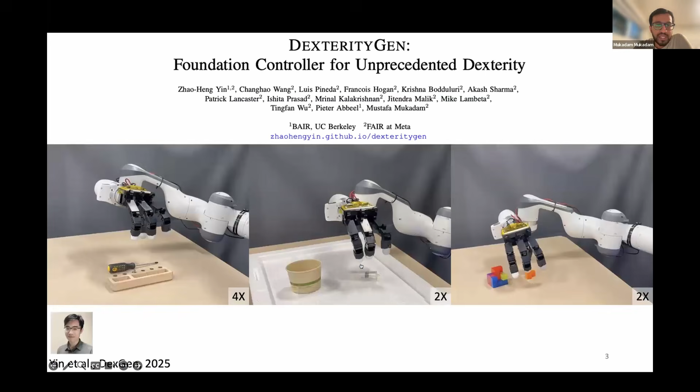And it turns out you can just kind of deploy these with these kinds of complex teleoperation plus skills tasks and show that you can basically do all of these things without ever even having trained on them. Essentially, because what you're exposing the policy to is these rich contact interactions, but not necessarily concerned about what the task is, because that high level information is what the human is going to provide in this setting. And that could be easily replaced by a high level policy or a behavior.

But then, building on top of that work, a lot of the new papers are also thinking about the same idea. What is the foundation model for dexterity? Can we leverage sim and then combine the high level information from humans and bring those two worlds together? But a common theme you will quickly start seeing as you go through these papers and DexGen, which they're inspired from, is basically they're all missing tactile. If you go to our paper or any of these papers in the future work section, you'll see, oh yeah, we want tactile, we want it there.

So what is the deal? Why isn't that happening? And then if it was happening, why do we care? Because it seems like we can do all of these tasks without tactile. So what is that really buying us? The way I've started thinking about this is really on an axis of how far the hand is away from the contact it's trying to control. And so as the degrees of separation increase, my sense is the task is getting increasingly complex. So it's not necessarily that you can't do it. It's more that you become less reliable and slow at doing those tasks.

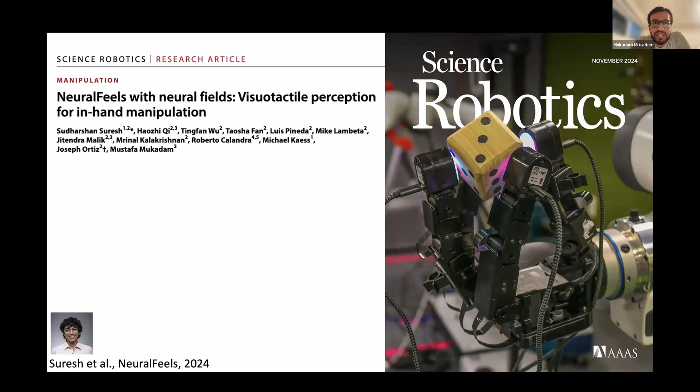And one of the things we saw was, in this work, NeuralFeels, that was led by Sudhu, we can essentially combine vision and touch to estimate novel object poses and shapes in real time as the robot is manipulating them. And a key observation we made in this work was essentially touch acts as a supplementary thing for vision at worst, when vision is completely not available, and when vision is available it almost complements it. And that's a key realization in hindsight, where if you have a lot of occlusion, that's where tactile really provides the value and also adds to the robustness for the tasks you might care about.

So the other thing you might see is like, yes, we can do these tasks, but we're only thinking about success, right? We're not thinking about robustness, or we're not talking about speed. Like these are all pretty sped up videos. We can do a lot better. We should try to think about how to do better.

And so I think we should, as a community, start thinking about what is beyond success and how do we get to speed and reliability, which is actually going to make robots more useful. And in fact, we should be thinking about those two things together. And that's what is commonly known in industry or automation as essentially throughput. And shout out to Pulkit, who recently gave a talk at ICRA making this exact same argument.

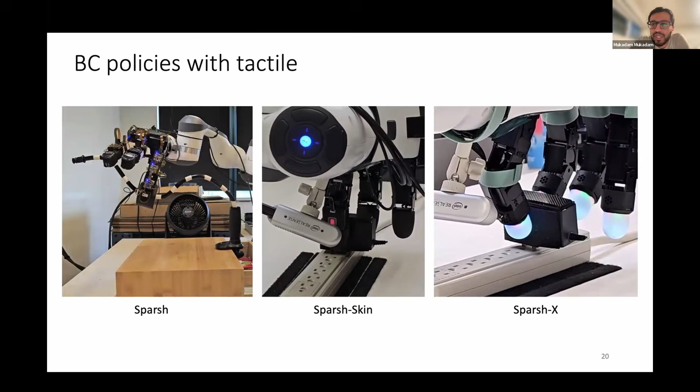But that's all well and good, and we can understand what these representations are capturing. But coming back to the question of how do we actually use it in policies, we could start doing the easy thing, where we essentially teleop and use our favorite behavior cloning paradigm with the sensor data that was collected, and sure, we can train these policies to do simpler manipulation tasks that are possible to teleoperate, and in some cases even show that having more sensory modalities like touch does help, and it actually improves significantly over just using a wrist camera.

But the question remains, right? What if we can't teleop the tasks, and as we discussed, we want to build these foundation models off of simulation data. How do we bridge this gap between a policy, or a foundation model for a policy, built in simulation, while your tactile encoder is built entirely in the real world with real sensors?

So one of the things we did in this work was essentially look at your state-of-the-art simple policy that can do in-hand object rotation. At this point, this has been pretty popular in terms of doing student-teacher RL in simulation using entirely proprioceptive data. What we ended up doing was deploying that sim to real and collecting a really small dataset, like 30 or so trajectories of the same hand doing the exact same task it was trained on in simulation, like the hand facing up and just rotating the object.

What we did was take the pre-trained tactile backbone and start with a zero convolution and slowly add that information into the base model, while keeping the encoder and the policy frozen, and only training on an offline objective of the difference between the actual actions that the policy executed versus the desired actions the policy had predicted. That signal alone is sufficient to slowly start increasing the contribution from this tactile encoder and merging it with the pre-trained encoder that you have from simulation.

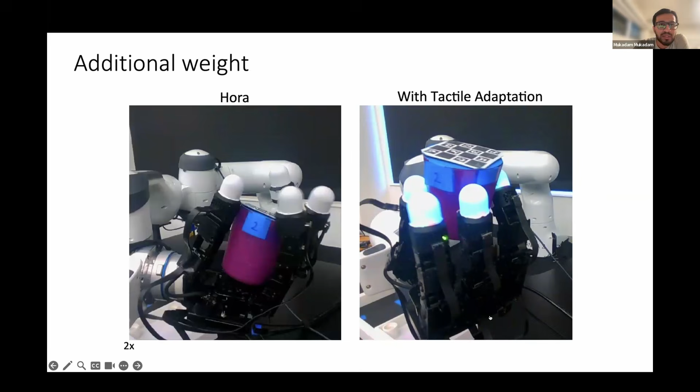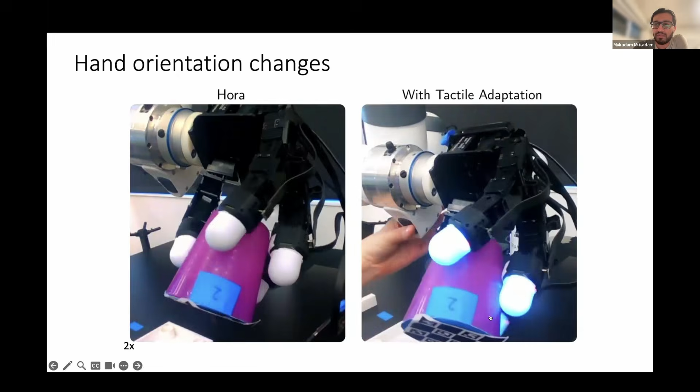What we saw was that same policy with this extra post-training adaptation step in the real world can start improving the simulation policy that hasn't been trained on those kinds of variations, entirely using the tactile sensor as the feedback mechanism. In this case, we can add additional weights. We can even put tape and change the frictional properties of the object, and continue to see more robustness, even though in simulation none of these have been trained. We can even change the orientation of the hand, which is definitely not something we had done in simulation, but the policy still remains robust once the tactile sensor starts providing feedback.

Another approach we looked at, building off of this, was: can we instead use real-world sensors as an extra observation to provide guidance, and take these sim-to-real policies, and instead of merging or blending the simulation encoder with the new encoder, train a new encoder that directly overwrites and learns on top of the original sim encoder? This work led by Rosie and Akash was released recently, called PTLD, which uses a privileged instrumented cell to collect a few demonstrations and then fine-tune on top of a privileged encoder that you get from simulation.

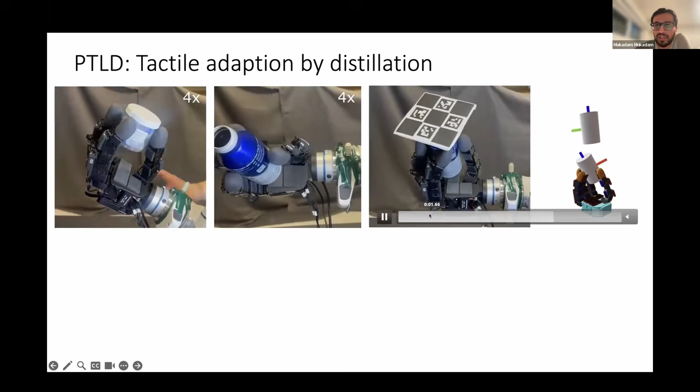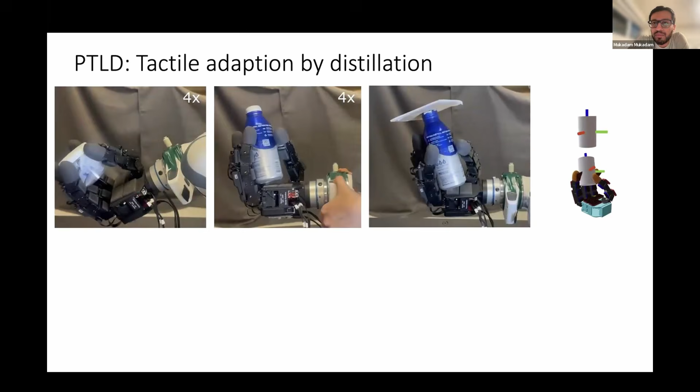What we find is pretty similar: proprioceptive policies transferred sim to real still lack robustness. As you can see in this example, the bottle keeps going up, which is pretty common in these rotation policies, either the object goes up or falls down. With this tactile encoder adaptation through this distillation process, you're able to bring back the robustness and close the loop with tactile. Here are some more examples of more objects doing rotation on the left, and on the right there is a full in-hand reorientation as well. These QR codes are used to provide the goal to the policy, as there is no other mechanism to provide a specific pose goal for the object.

We also compared the two approaches: the previous one I mentioned, which is adaptation through blending, and this approach, which is through distillation. At least in a narrow set of experiments with in-hand rotation, we find that using privileged sensors does help provide more robust information to adapt with the tactile sensors in a better way. That leads to policies that outperform just the pure blending adaptation.

And then, of course, we've mostly been talking about how we take sim policies that never see tactile, and then we only have tactile in the real world. But while the progress in tactile simulation has been slow, I'm starting to get more optimistic. This was a paper led by An and Jaejun that was presented at this RSS. One of the most difficult things with tactile simulation has been transferring shear between sim and real, right?

The older generation of simulations have been very good at transferring normal force, and in fact that was one of the results we had used even for the NeuralFeels work. The encoders were trained entirely sim to real, but because of the geometric nature of the problem we were looking at, it was fine and we could get away without necessarily having shear be pretty good sim to real. But with extrinsic contact interaction tasks where you care not just about the object in your hand but also how it interacts with the environment, you do feel that shear in your fingers and you want that to transfer better.

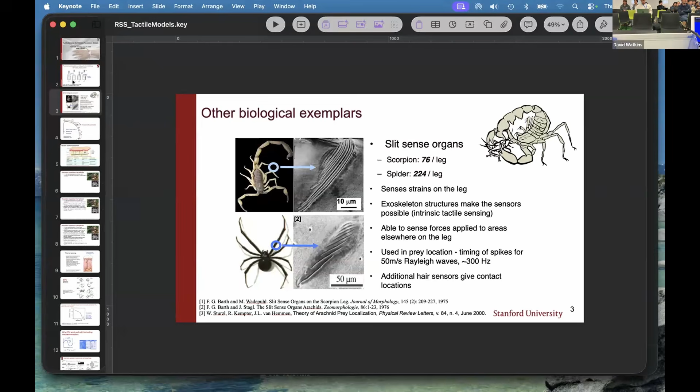All right everybody, by the way, can you see my slide screen? Yeah, okay. It's a pleasure to talk with you. I wish I could be there in person, but among other things I've been on jury duty all week, so I'm not able to travel. But it is a pleasure to talk with you nonetheless about tactile sensing, something I've been interested in now for over 35 years.

And I, with no exaggeration, believe that more progress is being made in tactile sensing within the last few years than in the previous 20. It's partly an evolution of technology and partly machine learning and multimodal learning.

It's interesting, a lot of what's going on is what I would call tactile servoing. And that's important, but it's by no means the only thing we use tactile sensing for, and I'm not even sure it's the major one. In fact, almost nothing that I say today is going to involve tactile servoing.

So my point is going to start out with the idea that tactile sensing—people talk about bringing tactile sensing in with vision—my point is that tactile sensing of itself is already multimodal, and I'll get to that in a few minutes. It's also fundamental.

If you go to the most primitive single cell animals, like a one-cell amoeba, it has to interact physically with the world, and so it has some primitive tactile sensing and response. Tactile sensing is not secondary to vision or chemical sensing. It's absolutely fundamental.

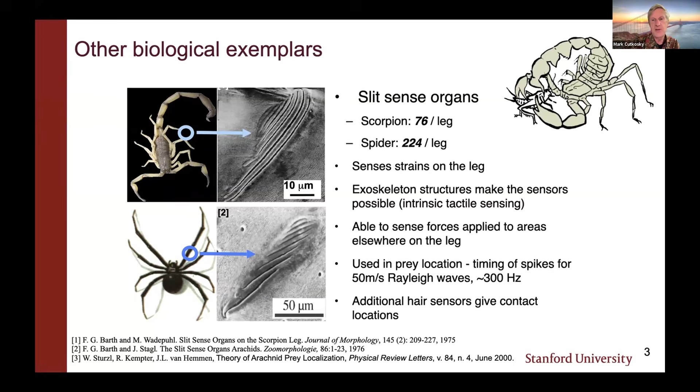All right, well I'm a bit of a disadvantage on this talk because I'm not there in the room with you, but I think I saw briefly during one of the questions that you're sitting on chairs that have a black seat and look like they have metal legs. I hope that's right, and so I'd like you to do a small hands-on exercise.

Take your hand and place it on the seat part of your chair. Now, I believe also that the legs of the chairs are metal. Now put your hand on the metal. You know immediately that it's metal. How do you know that?

Well, it feels cooler, but it's not cooler—they're all at the same room temperature. So it's worth thinking about why it feels cooler. This is actually a very important part of tactile sensing, and a big part of how we identify materials. I'll get more into it in a minute.

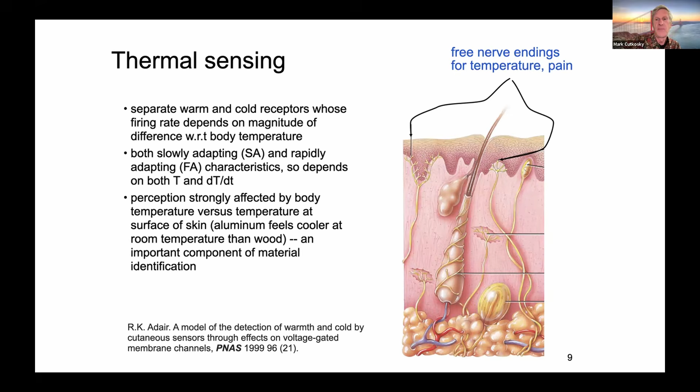And I would say that this mode of sensing, although it's not unheard of in robotics, it's still very underappreciated, especially given how important it is in our daily lives. We also, when exploring for things like texture, use stereotypical exploratory procedures. And again, there's been a bit of this in robotics, but maybe, I think, not enough. For example, when you do surveys across groups or populations of people, we have stereotypical ways that we detect texture, hardness, softness, and so forth. And this is something that has been taken advantage of a little bit in robotics, but not a great deal.

Let's get back to those dynamic sensors again. So I mentioned that the Pacinian corpuscles, they go up to 500 hertz. They actually have a peak sensitivity around 250 hertz, at which we can actually measure little bumps and things, little amplitudes down to just a few microns. And there's a good reason for that. Why would you want a sensor that's sensitive in that range? Well, let's look what happens if you're sliding over a surface.

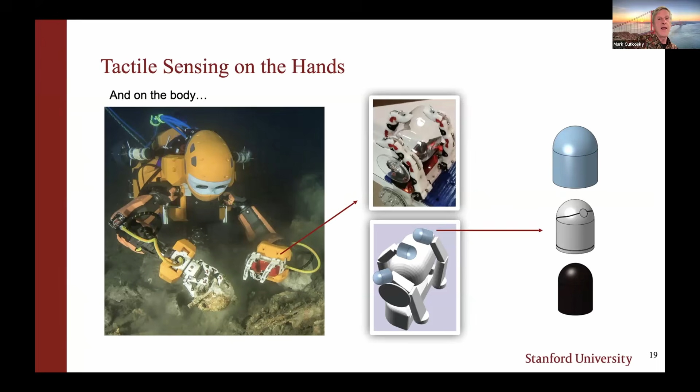So given all that, what are we looking at? Well, there is one technology that works well. It's optical fibers with Bragg gratings. These are used in the gas and oil industry, and you can build them into fingers and fingertips. And so that's what we've been starting to do. There's one paper that came out in IROS last year, but we're actually working on some new tactile sensing ideas. And I can talk about that in the Q&A if people are interested.

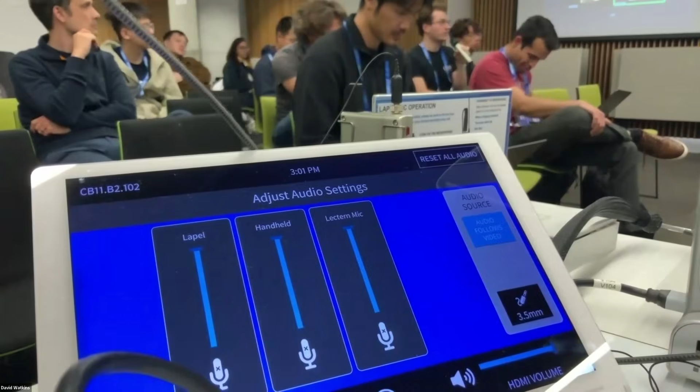There's one question in the room. Hey, thanks for the great talk. It seems to me one of the big reasons that visuo-tactile sensing has been really popular in the robot learning world is because we can use something akin to an RGB type data standard and have rectangular images for everything. I'm wondering, for some of these other types of subcutaneous tactile sensors that can't right now be represented that way, do you think the bottleneck to integrating them is the data representation, or is it the density of the sensors themselves?

I think it's both of those. There are efforts to do multimodal fusion, treating the dynamic sensing. In some ways it's closer to how people are starting to fuse audio with vision. And you do have to respect the fact that you're pulling in data at a fundamentally different rate. You do have to timestamp. I don't think you want to just downsample to match your vision, because then you lose the salience of these important tactile events.

But it is a fundamental thing, and you know this because if you watch a video conference and the connection is not great, you tolerate choppy video much better than you tolerate choppy audio. And it's really the same. Tactile sensing in that regard is much more like audio.

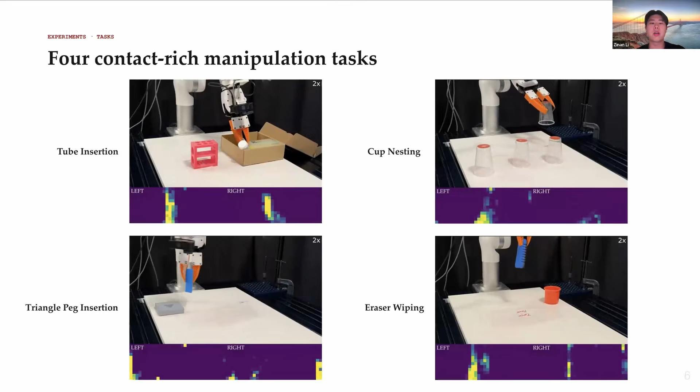We evaluate Felt on 4 contact-rich tasks: tube insertion, cup nesting, eraser wiping, and triangle peg insertion. We collect 60 demonstrations per task and train separate diffusion policies. This clip shows the 4 tasks with generated left and right tactile signals below each RGB frame.

Each method is evaluated for 20 real robot trials per task. Real tactile consistently improves over the vision-only method. Replacing the sensor at deployment with Felt-generated tactile also improves final success across all 4 tasks, matching real tactile on cup nesting and triangle peg insertion task.

Felt features use no real tactile readings during downstream policy training or deployment, yet remain competitive with real tactile and reach 90% on triangle peg insertion task.

To summarize, Felt generates structured per-finger tactile signal from a single RGB frame using a topology-aware architecture. Both generated tactile images and latent features improve contact-rich manipulation tasks over vision alone, enabling downstream policy without physical tactile sensors at deployment.

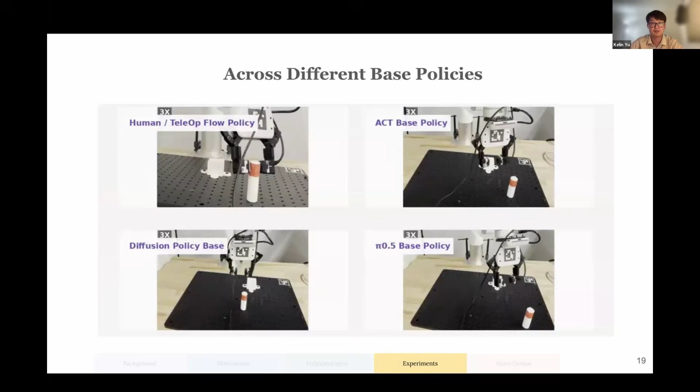And so we compare it with different RL pipelines to show that with this formulation, our pipeline with warm start and the general policy is more efficient. And we show that it can be generalized across different data sources, different base policies like human policy and Pi 0.5, and different tactile representations like different tactile encoders for tactile images and the tactile mask.

And we show that within 1 hour of training, it can increase success rate by 50% for all of them. And we also conduct evaluations for reward shaping, residual policy, warm start strategy, and the action space design. And finally, here is a one-take 40-minute training demo to show its effectiveness.

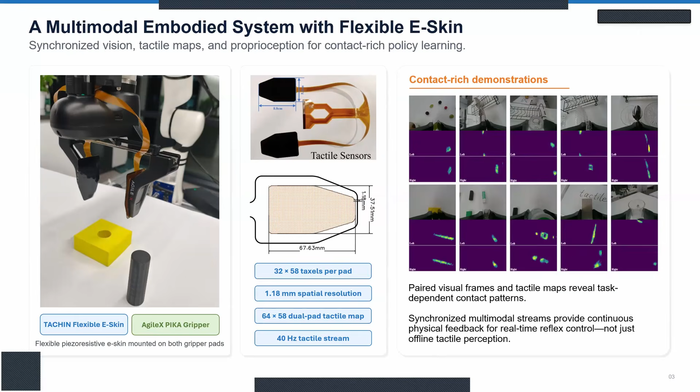Tac-Cerebellum has 3 modules. First, Mamba encodes fast tactile streams, suppressing redundant free-space history while retaining important contact transitions with linear complexity. Second, FiLM grounds each modality using the other modality and robot state, while SwiGLU routes stage-critical channels. This provides 2 benefits: intermodal balancing during contact and intramodal refinement that preserves stage-critical features.

Finally, in latent-to-action generation, the fused multimodal latent directly serves as the flow source, avoiding Gaussian initialization and repeated sensory conditioning.

We then evaluate disturbance rejection and safer contact response. When the cylinder is manually rotated, the vision-only baseline fails under partial occlusion. Tac-Cerebellum detects the tactile change and compensates. During misaligned insertion, the baseline keeps pressing downward, while Tac-Cerebellum detects asymmetric resistance and performs a compliant rollback. High-frequency touch therefore supports online correction and safer interaction.

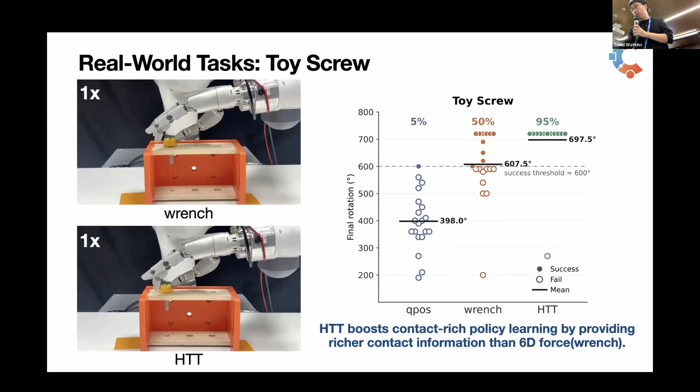We also conduct real-world tasks, for example, in toy screw, compared to using a 6D force vector on fingertips, HTT boosts contact-rich policy learning by providing richer contact information and leads to a much better success rate. And in another fragile grasping task, where we grasp a soft, room temperature tofu, HTT is shown to grasp the tofu gently without breaking it and without slipping, compared to using simple force vectors as the condition.

So through comprehensive evaluation, we show that HTT improves tactile perception performance, boosts policy learning, and adapts to unseen sensors in the real world. To summarize, we believe that learning from paired tactile data is a promising path toward generalizable tactile representations. From the data perspective, we propose the OmniTactile device that makes paired tactile data collection scalable. And from the model perspective, we propose cross-modality alignment on paired data, showing that it can further improve heterogeneous tactile pre-training compared to MAE pre-training alone.

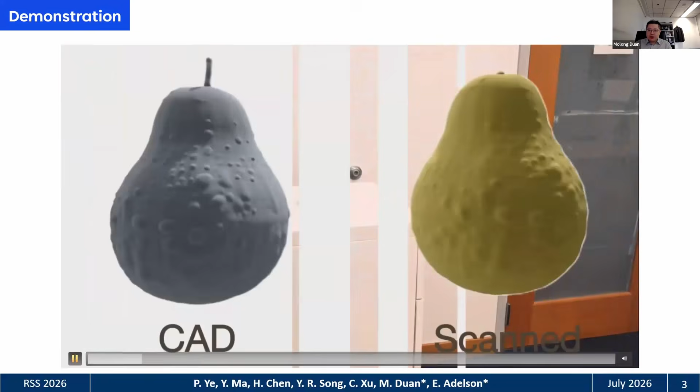Since this is a short presentation, we would like to start with a demonstration first and then gradually go deeper into the method. In the beginning, we use an iPad type of scanning app - this is the Kiri app, which enables direct scanning from our mobile devices. Once we have the CAD data, either from scanning or the original CAD data, we have a mesh-to-point process where you basically have this dense cloud.

With this cloud, we perform partitioning so you have a lot of small patches distributed along the surfaces. We have smaller local tactile points which will be used as the testing data. After that, we also have the experimental demonstration showing that if we have both the contact from the motion capture system with the tactile sensing and a particular object, we have a ground truth signal to verify the detailed localization methods. Then we can use that for downstream tasks.

With that highlight information, I would like to go deeper into this. The first stage is relatively straightforward - we just have this decomposition. In the second stage, we have the tactile surface localization with the point cloud and patch information. Assuming real-time point cloud information from the tactile sensor, we can establish a neural network with a tactile encoder with surface patch matching.

So you know how close this current real-time measurement maps with your existing patches of existing information. Then you can have additional pre-trained weights and a determination module to understand the final pose in this manipulation task. We have a coarse-to-fine localization network with virtual pre-training using patch samples dense from the mesh, and few-shot fine-tuning from a small set of real tactile contacts. Here is the detailed network structure.

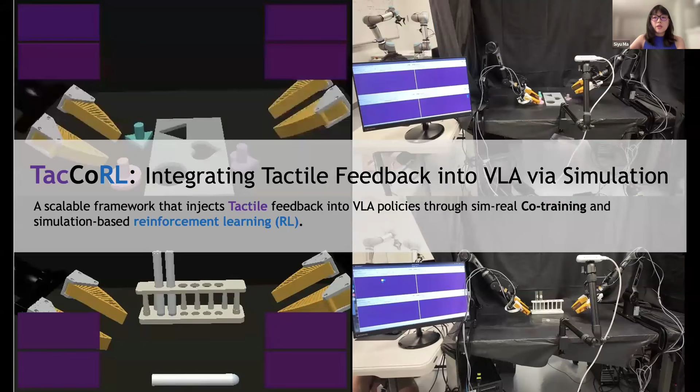To integrate tactile feedback into pre-trained VLA policies through simulation, we present TacCoRL, a scalable framework that combines sim-real co-training with simulation-based reinforcement learning.

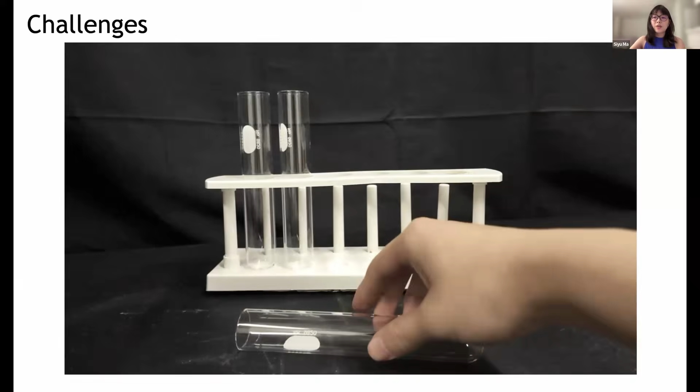Precise contact-rich manipulation requires both vision and touch. Vision interprets the scene, while touch reveals contact interactions. For robots, the challenges are clear: visual ambiguity in subtle contact states, limited supervision for near-failure recovery, and the cost and risk of exploring failures directly on hardware.

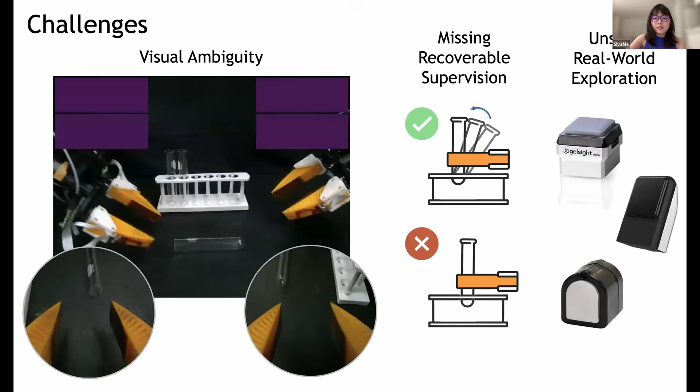To address these challenges, we propose a three-stage framework. First, we collect a small set of real demonstrations and expand simulated teleoperation data with MimicGen.

Then, supervised training injects tactile history into the vision language model backbone and action expert, giving the pre-trained vision language action model an initial tactile-conditioned behavior. This makes sparse reward reinforcement learning tractable by turning exploration from scratch into contact-aware policy refinement.

Finally, RL fine-tuning uses sparse reward in simulation to learn contact corrections, where real demonstrations enter the update and prevent simulator-specific drift. Our pipeline enables TacCoRL to adapt VLA policies with limited real data and safely refine tactile-guided behavior in simulation.

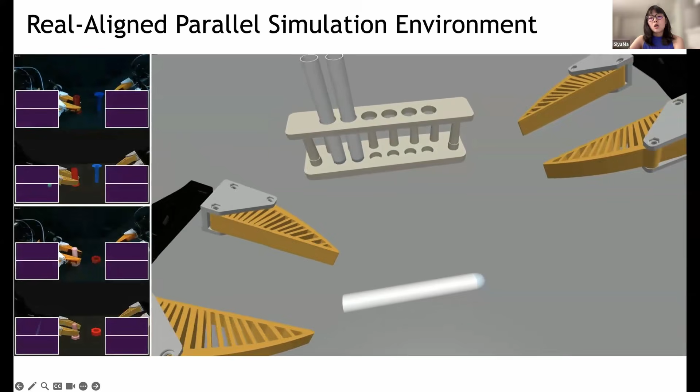To make simulation training useful on the real robot, the simulator must match how our policy sees, acts, and feels. So we align the task settings, cameras, controller response, and tactile readings using 128 parallel simulation environments. The policy can safely learn contact recovery behaviors that are hard and difficult to collect on real hardware.

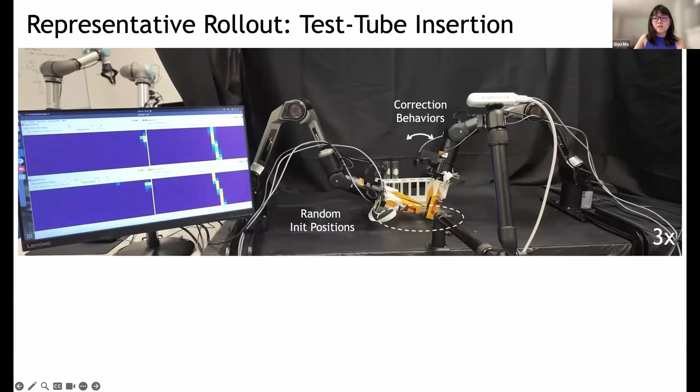Here's the representative real rollout for test tube insertion. Across trials, the tube starts from randomized initial pose. As the robot approaches the rack, the gripper and the tube increasingly occlude the opening, making the critical contact states difficult to infer from vision alone.

Upon rim contact, TacCoRL uses tactile history to make small closed-loop translational and rotational corrections rather than pushing directly downward. These adjustments reduce angular misalignment and enable continued insertion, allowing the policy to recover from diverse near-failure contacts and complete four consecutive real-world insertions in this representative rollout.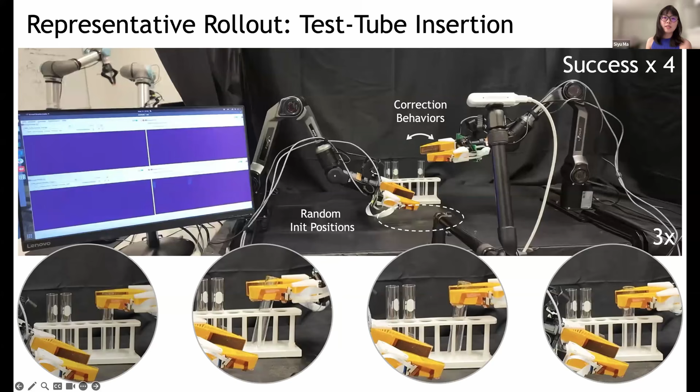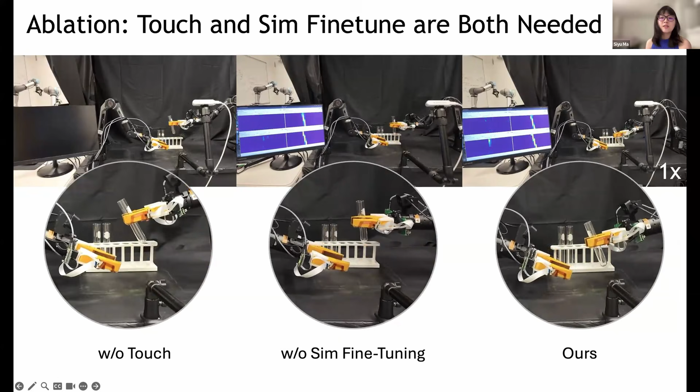This ablation shows that both touch and simulation fine-tuning are needed. Without touch, the policy cannot observe hidden contact errors after occlusion, so it often keeps pushing in the wrong direction. With touch but without simulation fine-tuning, the policy can receive tactile signals, but it hasn't learned how to convert tactile readings into recovery actions. Our method combines tactile feedback with simulated trial and error, allowing the policy to search, reorient, and stabilize contact before insertion. This leads to more reliable contact-rich manipulation.

We evaluate our policy on 4 real bimanual contact-rich tasks: test tube insertion, puzzle placement, and 2 assembly tasks. Across these randomized real-world trials, the final Visuo-Tactile policy achieves 72.5% average success rate. This demonstrates that tactile feedback, refined through real-to-sim simulation, can generalize across contact-rich settings and be effectively integrated into pre-trained VLA policies.

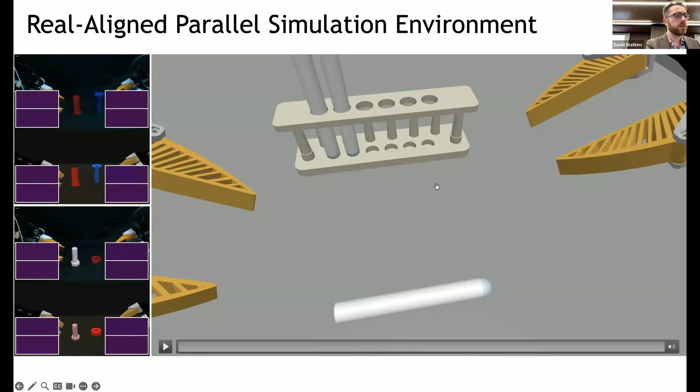Cool. Can you see my screen? Yes. Yeah, thank you so much. So this is Yuyang Li from Peking University in China.

I'm glad to be here to share about our recent paper on fingertip integrated simultaneous tactile visual sensing for multimodal robotic manipulation. Everybody in the room might be familiar with vision-based tactile sensors, or VBTS. From early research from MIT to recent commercial products, our lab has been tracking its progress, building the F-TAC Hand with full hand tactile sensing, TacMan for articulated object manipulation with tactile, and Taccel, the vision-based tactile sensor simulator on GPU.

Throughout our research, one key issue of tactile sensors has been bothering me: they're blind until the moment of contact. They only provide post-contact feedback, and cannot perceive the last-inch gap near the fingertip prior to interaction, which is really vital for precise contact and manipulation.

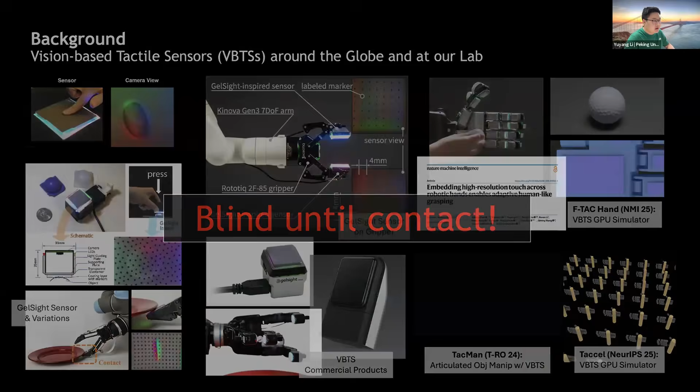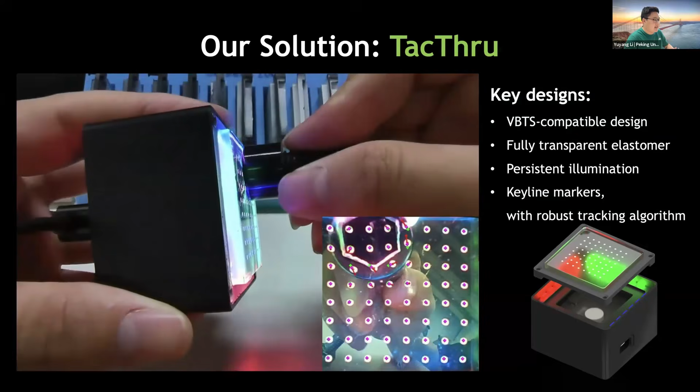To bridge this gap, our solution is called TacThru. It is a see-through skin sensor that provides simultaneous vision and tactile sensing from the robot's fingertips. It's based on a VBTS design, but it removes the reflective coat so the camera inside can see through its skin, which is the transparent elastomer. The robot can now actually see the object from its fingertip prior to the moment of contact, while also tracking the visual and tactile signals of the object and environment throughout the entire interaction process.

The issue here for tactile sensing is that although the transparent elastomer makes vision clear, it also makes it tough for tracking conventional tactile markers like the black ones you see here, as they may vanish when the background is also black. So we designed keyline markers, producing concentric double-layered markers with high contrasted colors, the black and white ones, so the detectable feature will always be visible to the camera.

This is more clearly demonstrated by the comparison here. You can see the black markers easily vanish due to the dark background, while our keyline markers ensure detectability and no marker is missed. We also introduce a super lightweight blob filtering technique to reduce false positives from blob-like patterns in the environment being misdetected as markers.

Finally, we can firmly track all the real markers as shown by the green arrows here. This tracking is super effective and efficient, achieving full marker tracking with only a subtle time budget of about 6 milliseconds. This enables high frequency runs like 120 Hz. The fabrication of TacThru is also super compatible with VBTS sensors, so if you can make a VBTS sensor at your lab, which I believe you can, then you can try to build a TacThru sensor using exactly the same material.

And before you get your hands dirty, check out our further results on manipulation through a UMI platform performing various tasks, including picking up a thin and soft tissue, a paper tissue that tactile sensors fail to detect, and sorting tiny balls into the correct bowl that are hard to see from the wrist camera.

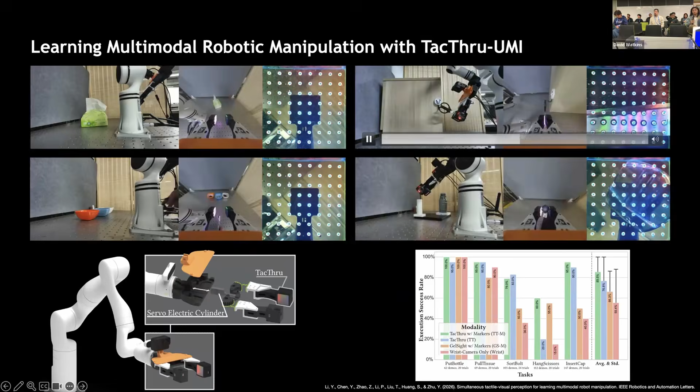All right. All right, so just place your computer over there. Perfect. No, please share just so we can keep recording. Make sure you haven't enabled your microphone. I haven't. Great.

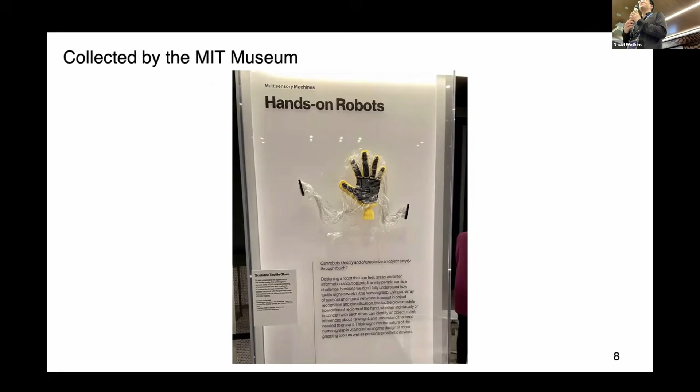And the glove right now is actually collected by the MIT Museum. If you have a chance to go to Boston, this will be the first thing you see when you enter the AI section of the MIT Museum.

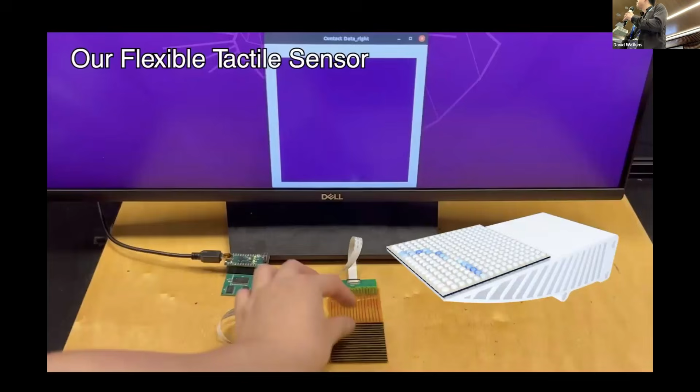So since then, obviously, we want to make sure this kind of sensor is compatible and useful for robots, and especially think about the scaling up efforts of these tactile signals. So we first make sure we can learn visual tactile policies for robots to do manipulation and scale up both the simulation data and the real data. Start from the first work, 3D ViTac. This is actually one of the first works we have been doing since I became a professor.

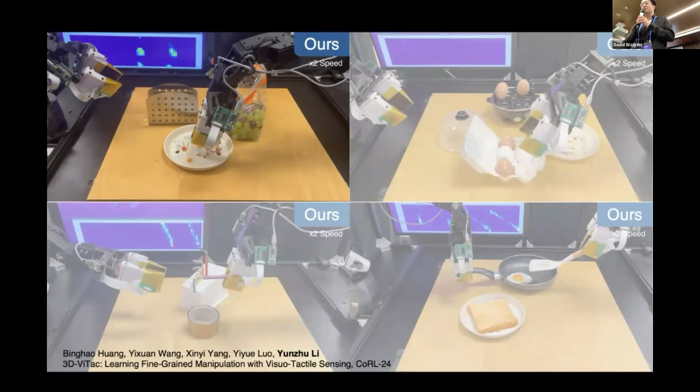So we extend upon the sensor to make it higher resolution, with a better signal to noise ratio, and more importantly, make sure it can be integrated with the robot fingers. So what we did was integrate our tactile sensor on the robot gripper, and we did imitation learning. Here on the back, you can see the real-time visualizations of the tactile signals, which show that the robot can rely on the tactile signal to know whether there are grapes between the fingers or not in the face of visual occlusion.

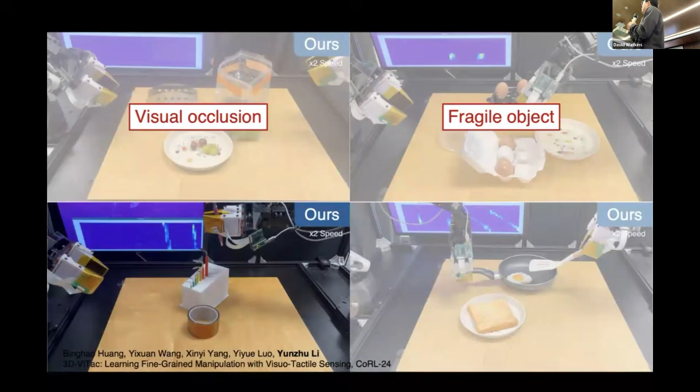For the top right, the robot is trying to grasp an egg, and there will be a person perturbing the robot from doing the job. The robot knows to try again because it feels nothing between the fingers and redoes the grasping behavior. It can also do precise in-hand reorientation, where the tactile sensing on the back screen shows the precise position and orientation of the hex key between the fingers, and also bimanual coordination.

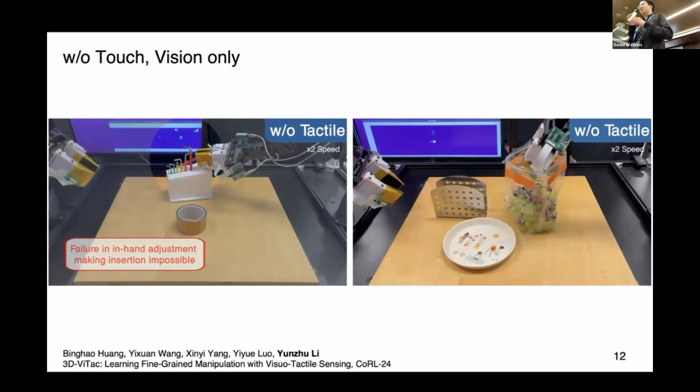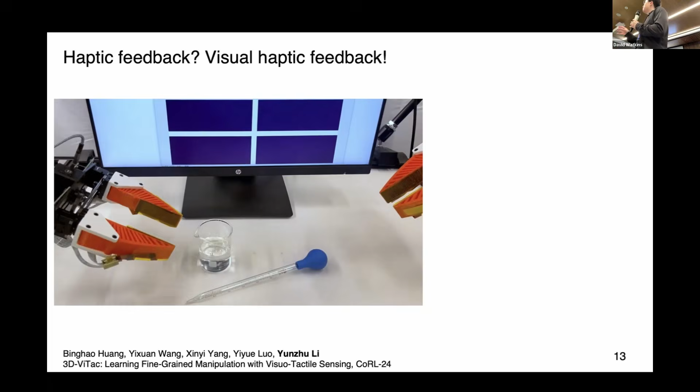Then there's actually one very interesting observation we got when we did this paper. When the human teleoperator collects the visuo-tactile demonstration data, we found it is very, very beneficial to give the human some visualizations of the tactile signals. Because the device itself, we use ALOHA, didn't provide the human subject with haptic feedback. But visualizing the tactile signals can be regarded as a type of visual haptic feedback.

And we realized it can actually significantly improve the human subject's success rates, and also the efficiency at which the human subject is able to collect demonstrations. Meaning this kind of visual haptic feedback is very handy for the human subject to know whether it's time to switch to the next subtask, or to have a better understanding of the system state.

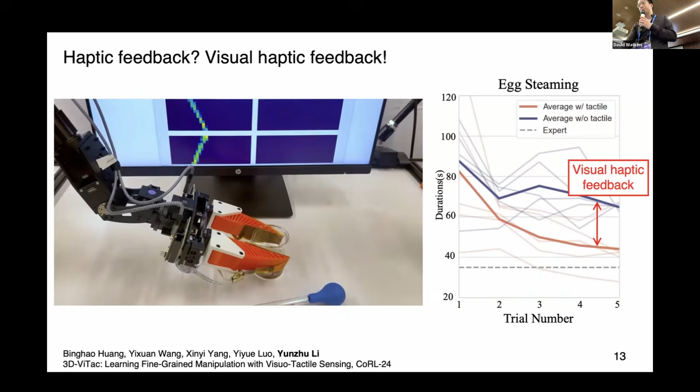Another question we typically get is about the sensor resolution. Our sensor resolution is about 2 to 3 millimeters. And people are asking, how does that compare with humans? There's actually a very famous cognitive study, I remember it was in the 80s, trying to understand the sensitivity of different parts of the human body. They came up with a very interesting experiment called two-point discrimination.

Our lab has hugely benefited from many open source hardware projects. So we made very strong commitments and efforts to make sure the sensor is as reproducible and as accessible as possible. We released a very detailed reproduction guide with step-by-step fabrication instructions for everyone to reproduce this sensor. Some people are also asking about the cost. Given our most recent design, assuming all the materials have arrived, it will only take you 2 minutes to put the sensor together and the sensor can start functioning.

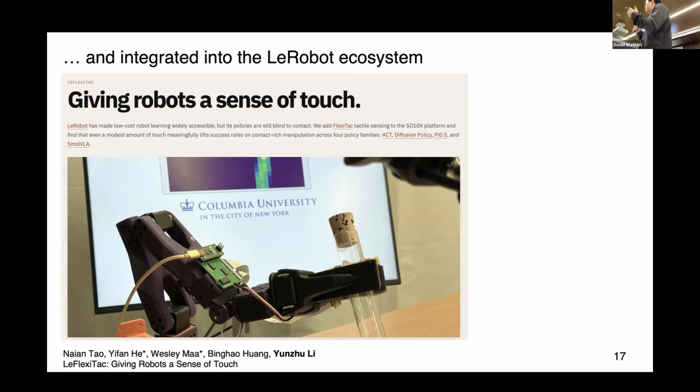We have also made a lot of efforts to make sure the sensor is compatible with the LeRobot ecosystem, such that for people who are interested in and have the capacity to play around with the LeRobot ecosystem, it will be easy to put the sensors into LeRobot systems to do many different manipulation tasks using the SO-101 robots. So we made a lot of efforts to increase the accessibility of our sensor.

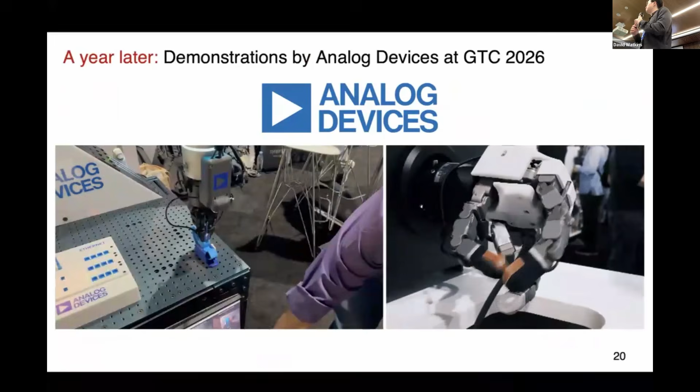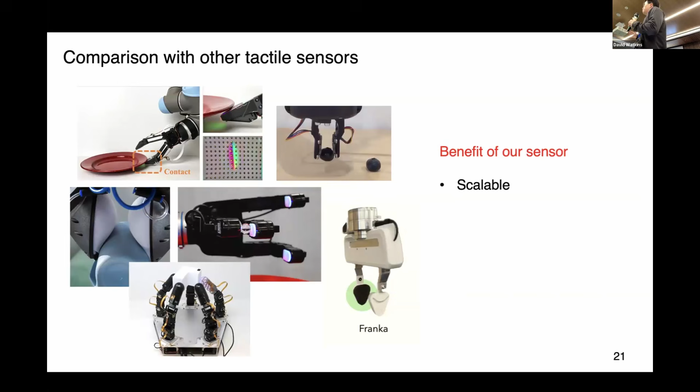Many of you might also have the question, how does the sensor compare with other tactile sensors? One interesting thing about touch compared with vision is that touch is still a field where the mechanism hasn't converged yet. Many people have different opinions and preferences about the sensor. Compared with other ones, especially optical-based, capacitive-based, and magnetic-based ones, our sensor is scalable. It can be produced at a large scale, and at different sizes with different coverage areas. It's also very flexible. In essence, our sensor is just a piece of paper. You can bend and stretch it like you might do to your paper. It's also very easily customizable into different form factors.

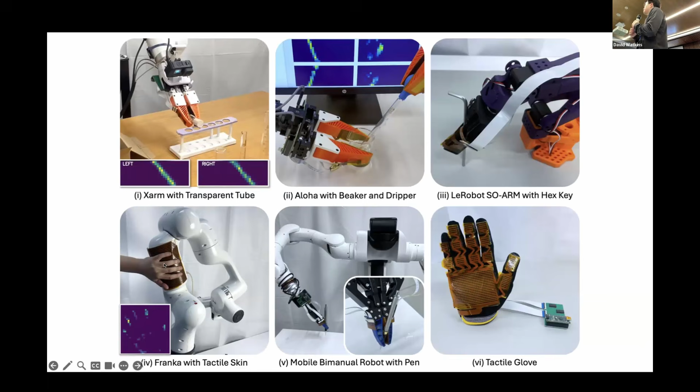We have already shown that our sensor can be customized into, for example, glove shapes or fingertip shapes, and also some kind of robot skins for the robot to get some more scalable understanding about those kinds of contact events.

And it also has very good robustness and consistency. When I talk about consistency, it's about consistency across different types of use and also different fabrications of the sensors. One data point I can give you is that my students fabricated four sensors for NVIDIA during the summer of 2024. About 1.5 years later, they are still using the sensors, and the sensors still enable the robots to do exactly the same task. So that speaks to the overall robustness and consistency of our sensor.

And lastly, I want to highlight one very important benefit, which is the compatibility of our sensors with simulation. We just heard a spotlight talk that uses our sensor, and they are also building simulators around it. The most important aspect of simulation is the correlation and alignment between real tactile sensing and simulated tactile sensing.

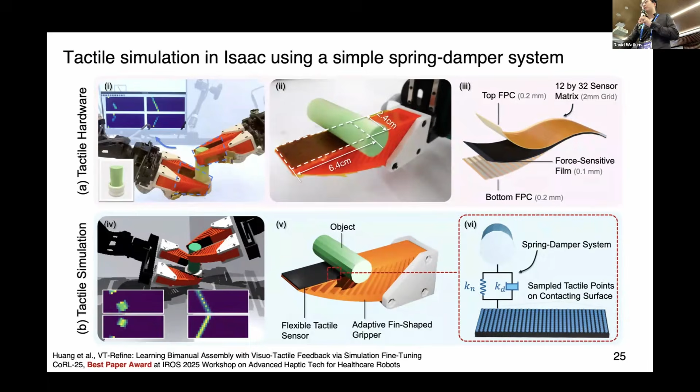So we implemented a very scalable and efficient implementation for our tactile simulation based on spring-damper systems. Very simple, just 2 parameters for you to identify. And what we can achieve is the simulation shown on the right. It has very strong alignment with whatever happens in the real environment.

After you have the simulation, there are so many things you can do in simulation. One notable thing we did was to go through this real-to-sim-to-real loop, using scalable simulation reinforcement learning training procedures to fine-tune the policies so they work in the real environment. Here is one example showing robots equipped with our sensor going through this real-to-sim-to-real procedure, allowing the robot to do bimanual assembly of pieces from the factory benchmark. These are actually robots in my lab.

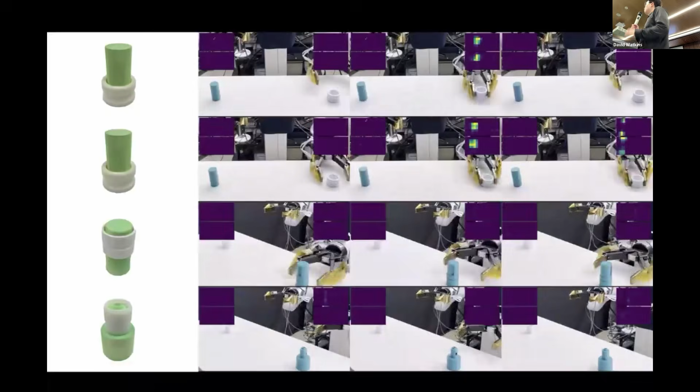And we have also shown that exactly the same pipeline works on the robots at NVIDIA. They are also following this real-to-sim-to-real pipeline, doing simulation fine-tuning of visuo-tactile policies for the bimanual assembly task. So this is how we are scaling up the simulation data. At the same time, we're also trying to scale up the real data.

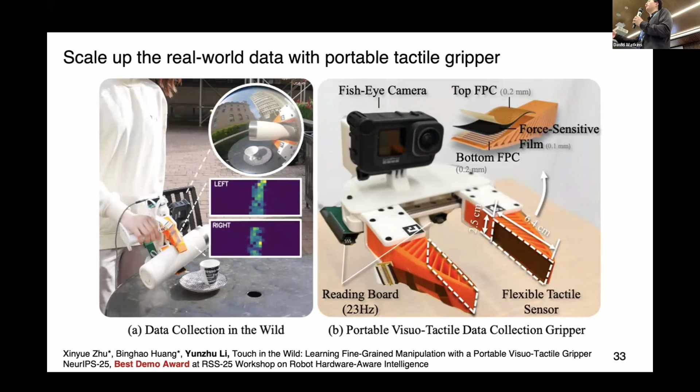On the real side, what we have been doing is in some ways similar to what other people have been thinking about. It integrates the tactile sensors into the UMI gripper. There's one very interesting insight in this process. For anyone who has played with UMI grippers, it's essentially a handheld device you use to do in-the-wild data collection.

Because of the mechanical spring within the UMI gripper, the human subject actually feels haptic feedback during the interaction. But the original UMI design never stored any of that haptic information; only position information was stored. So that is a very important missing piece of the original UMI. Integrating our tactile sensors into the UMI gripper not only keeps it very portable for in-the-wild data collection, but also fills in the last missing piece by storing the haptic feedback indirectly in the form of tactile signals.

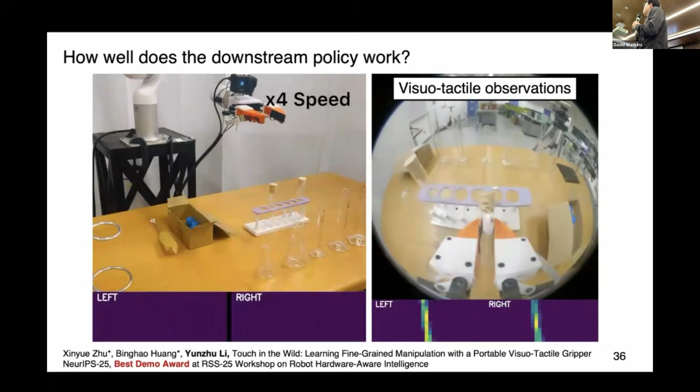And on the right is the exact input to our policy, where the first row is the visual information and the second row is the tactile signal. Just from visual information alone, it's very hard to see the position and orientation of the transparent test tube. But from the tactile signal, the specific in-hand object state is very obvious. And that is very important for the robot to successfully accomplish this task.

So we have also done many other tasks using this pre-training and post-training framework, like in-hand reorientation and insertion of the pencil. And also tasks that require precise force modulation, where you want to release the gripper to suck the fluids into the glassware, but you don't want to release it too much, such that you release the pipette. So this requires very precise force modulation. And also, obviously, the classic one of wiping the whiteboard. So this has been our effort to also scale up the real data.

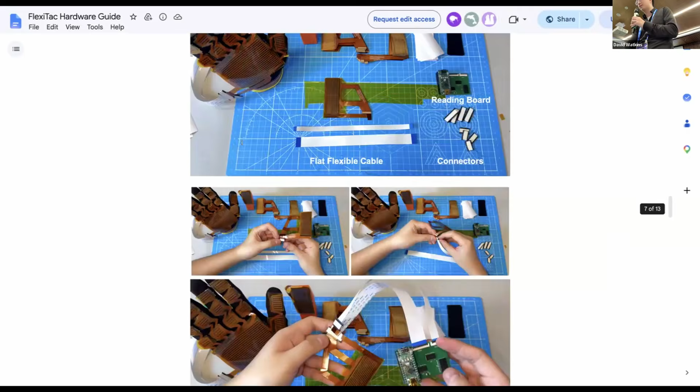On this front, we have actually been releasing a lot of open source resources for you to play with. For example, this is our fabrication guide. It's simple but works. We have, for example, the bill of materials for you to follow in order to get all the materials you need. And we also have very detailed fabrication guides together with videos showing you how you can very quickly put the sensors together and connect them with the hardware in order to read out the tactile information.

We have also released the simulation environments that we use to do the simulation fine-tuning, specifically in both Isaac Gym and Isaac Sim. This unlocks a lot of possibilities for you to use all the power of GPU-accelerated simulation. And we have also put up a list of works that are built on top of our sensors. And really you can see that our tactile sensors, although the mechanism is very simple, are starting to grow into an ecosystem where many people are building on top of our sensors for many different manipulation and interaction tasks.

So in the end, I want to share one teaser work that is still ongoing, but we have actually achieved some very interesting manipulation and world modeling results with both vision and touch. Here, what you are seeing is a multimodal 3D world model. What you are seeing here is a live interaction using keyboards to control the robot to do this kind of bimanual in-hand reorientation and insertion process. This is not a real recording. This is not physics-based simulation. This is pure action-conditioned 3D video prediction. And this can run at 15 Hertz.

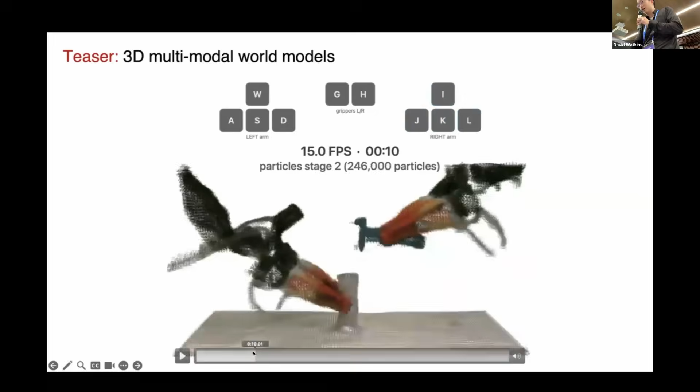And you can also see, during the insertion process, the visualization of the tactile signal, which has very nice alignment between our tactile pads and our visual point clouds. So you can distinguish between two cases. One, where you haven't been able to get a good alignment, so you slide over the tube. And here is the second example. After you have done more precise in-hand reorientation and more precise alignment, it will be able to actually insert the piece on the right into the tube. So this shows a very nuanced understanding of physical interactions using our 3D multimodal world models that you can interact with in real time.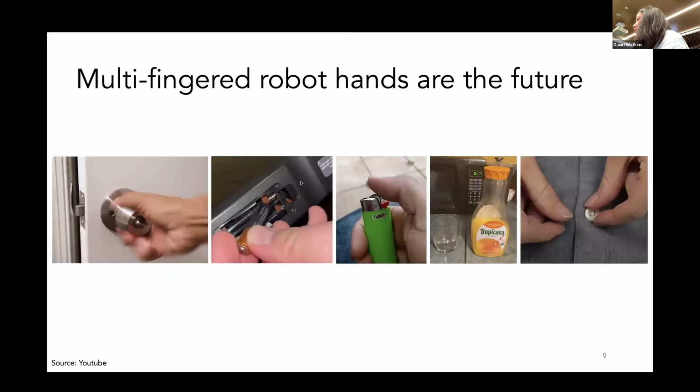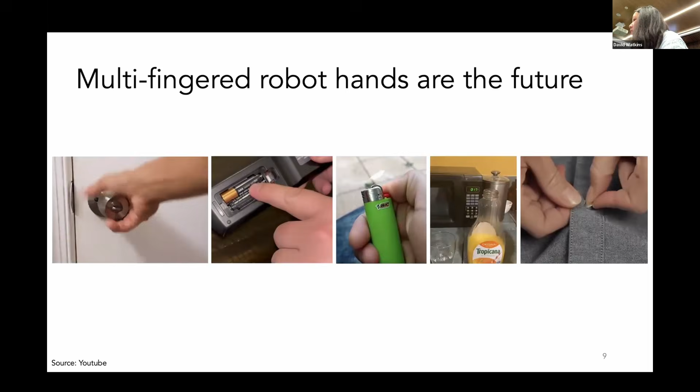I believe that this next step change is general and useful manipulation in human environments via dexterous robot hands. Parallel jaw grippers have taken us quite far, but they still hit fundamental limits in human environments. When we consider these kind of everyday tasks, they all require, or would be dramatically easier with, the fine motor control and adaptability that multi-fingered hands can provide. This is why dexterous robot hands are the next frontier for truly general manipulation.

However, robot hands also introduce new challenges. First, dexterous manipulation is full of visual occlusions. Multi-fingered hands create self-occlusions, which scale with the number of fingers. There are also occlusions from clutter and hand-object interactions, which cannot be resolved with even several cameras in uncontrolled, in-the-wild environments. Tactile sensing is extremely complementary to vision by providing data exactly where these occlusions are occurring.

Second, with multi-fingered hands, we also introduce both much more contact with the robot and expand the diversity of contacts that we can control. I think manipulation really boils down to controlling contact. If our robots are not able to sense contact at all, I don't see how we can expect our robots to control it.

Okay, so back to my research question. I've defined what I think the next step change is, and now I'll talk about how I think we can leverage tactile sensors. I think currently the main bottleneck for progress in figuring out how to leverage tactile sensors is the lack of dexterous robot data. And before I go too far, I just want to clarify, I know there's no universal definition of dexterous, so I will define dexterous as independent, coordinated control of fingers required to successfully complete the task.

We've seen data-driven approaches really dominate and push forward the progress of other modalities in research, such as, of course, language and vision. And now we're really seeing this impact in robotics. But we have not really been able to extend this to the tactile modality for dexterous robots.

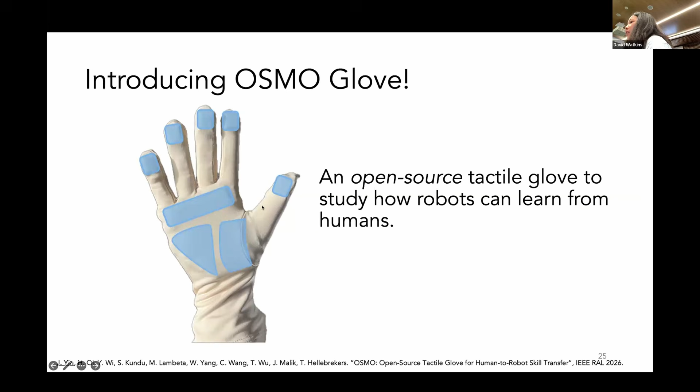So here I'm excited to introduce the Osmo Glove, which is an open source tactile glove to study how robots can learn from humans. And so here we show where the tactile sensors are on the glove. And so we designed this glove to fulfill our wish list for what we want to see in tactile collection

devices. So first, it has 3-axis force sensing. It has full hand tactile coverage. We have compatibility with in the wild hand tracking. We preserve and capture human dexterity. And this glove is deployable in robots. And now I'll dive a bit deeper into each of the core features of the Osmo Glove.

So the first, which is the rich tactile data, this glove uses a magnetic sensing principle. And how this works is that we basically place a magnetic skin on top of a magnetometer. And when the magnetic skin deforms, the magnetometer measures 3-axis magnetic flux, which is strongly correlated with normal and shear forces. And this builds a lot on the work of ReSkin and AnySkin.

And for in the wild hand tracker compatibility, the Osmo Glove broadly supports vision-based hand tracking. So we chose this beige color because it's in distribution for a lot of RGB hand tracking models. And the Osmo Glove has a low profile form factor, so it doesn't have huge electronics or exoskeletons or anything like that. That both minimizes encumbrance and visually looks like a human hand, so there are no modifications needed to hand tracking algorithms.

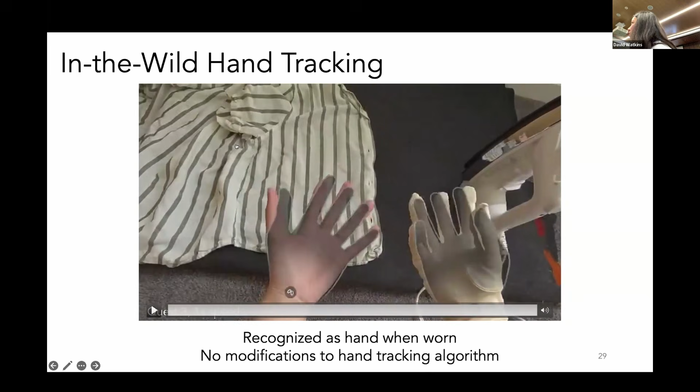So in this video, what I want to highlight is that this is something that just works. So here I'm just donning the glove. I have the Quest. The Quest just picks it up as a hand, and you can qualitatively compare how the hand tracking works compared to my left hand. So yeah, Quest tracking is not 100%, but it's not qualitatively worse than bare hand tracking.

And for hand tracking through occlusion, we also integrate the Osmo sensors with the Manus hand tracking glove. So even though the Manus gloves, if you know those gloves, use electromagnetic sensors for fingertip tracking, our sensors actually do not interfere. They operate in different frequencies.

And finally, the Osmo glove is deployable on biomimetic hands to minimize the visual and tactile gap. So this is really convenient because this essentially lets us not do any special vision inpainting or overlays or masking at all. You can directly use data that you collected on the human with the glove and just deploy that on a robot wearing the glove. So this is the Psyonic Ability Hand wearing the glove.

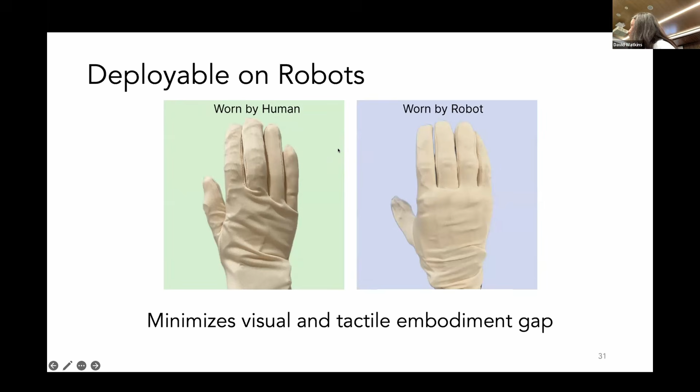And because I'm using the same glove for data collection and deployment, the sensor locations, the data format, the noise characteristics of the glove are the same, and visually they're also the same.

In this work, we follow a pretty standard human to robot policy pipeline. Honestly, not that special or interesting. Essentially, we convert all of our human trajectories to robot data with inverse kinematics. We construct our data set from the retargeted trajectories, and we directly use, without modifying, the RGB images and the tactile glove data from the human. Then we train a diffusion policy.

So to briefly summarize, we built the Osmo glove to realize our vision for how we can collect dexterous tactile data. And I think beyond the actual hardware, I hope that sharing our vision for what wearable tactile glove design principles should be is the main takeaway from our work. And like I said, this is all open source. It's available on GitHub, all the code we used for data collection, training, and deployment.

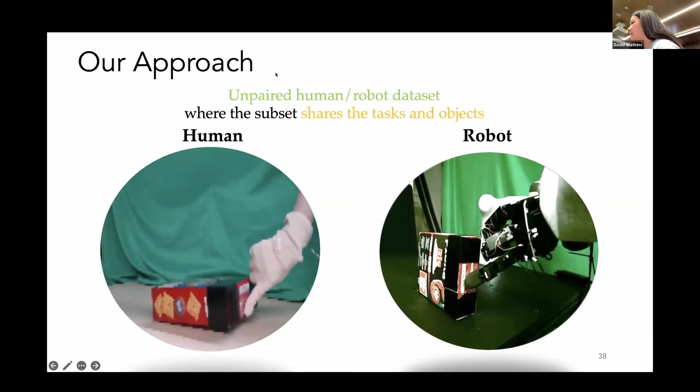So our approach is that we collect an unpaired human and robot dataset where there's overlap between the same task and some of the same objects. Then we independently learn self-supervised tactile latent distributions. And then we learn a human to robot tactile feature mapping via pseudo-pairs within the same task and object.

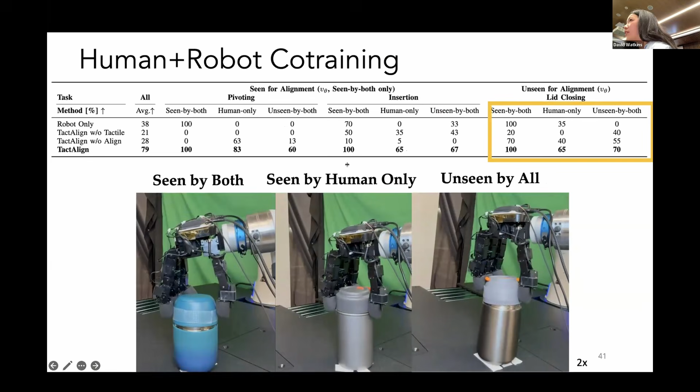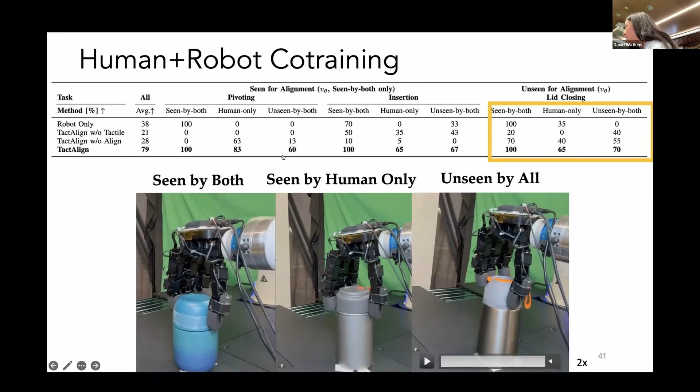So again, these are different. These are the Xela sensors, and all this data was collected with the Osmo sensors. Light bulb, and here we demonstrate with human data only, no robot data used for this task at all. Light bulb screwing is a particularly challenging task because it involves, in this case, severe occlusions from the lampshade, and the bulb is small relative to the robot fingers. So as a result, collecting a robot teleop dataset without tactile feedback is pretty difficult.

On the left, we show the human demonstrations where only 10 minutes were used to collect 20 trajectories. We have a no tactile baseline, which failed to make contact with the bulb. We also have a no alignment baseline, which made contact but frequently jammed. In contrast, our full method achieves robust and stable light bulb screwing.

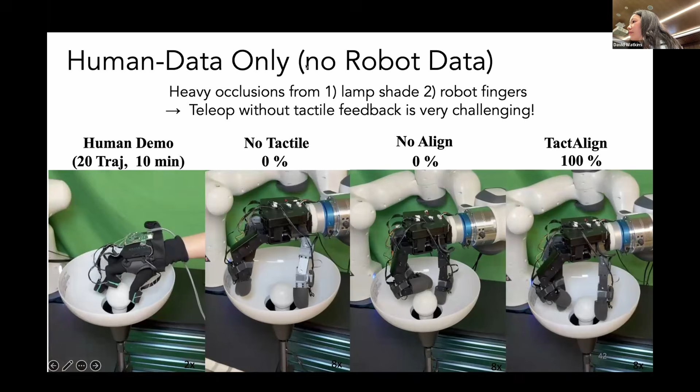Okay, so for the main takeaways, we introduced the Osmo Tactile Glove as a more scalable way to collect real-world dexterous data from humans. We have the first iteration of the hardware and a set of design principles that we defined for wearable tactile glove development. We also introduced TactAlign for cross-embodiment transfer between humans, robots, and different sensors for data collection and policy deployment. And we also show that the Osmo Tactile Glove data can be zero-shot transferred from human to robot embodiments, with tasks like wiping and light bulb screwing.

Okay, so now that wraps up the real-world data section. And now we'll talk about synthetic data, in this case, tactile simulation.

And in these works that do use binary contact, they've shown that tactile feedback enables significant improvements in performance and robustness. However, we know that our tactile sensing hardware is capable of providing much richer data than just binary normal force. So this begs the question, why are people not using tactile sensing? What is the bottleneck, and how can we unlock rich tactile sensing for sim-to-real RL?

So what's the bottleneck here? Well, RL policies need a lot of data because they're super sample inefficient. And if you were to generate this data on a real robot, you would need months of data to learn a policy from scratch. But in simulation, we can produce all of that data in just a few hours. So we have to use fast GPU-parallelized simulators for RL to be a tractable approach. And IsaacGym or Isaac Lab is kind of the gold standard here.

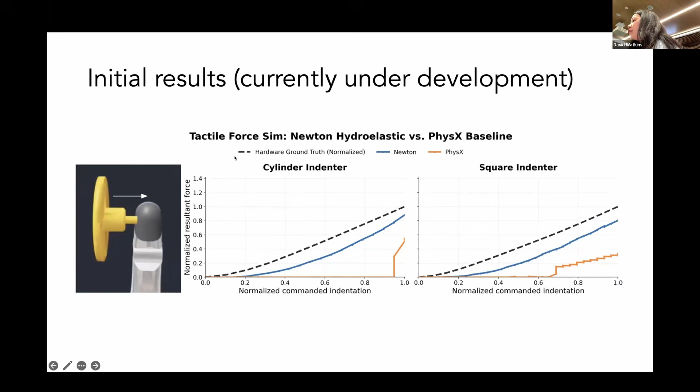So yeah, just excited to share NVIDIA and Sharpa co-developed tactile simulation coming soon. Again, we are really looking at high throughput in terms of optimizing speed, environment steps per second, GPU memory usage. Looking at high fidelity, we want to enable zero-shot sim-to-real tactile transfer for Isaac Lab and Newton.

So in conclusion, this kind of covers my work. Sorry, I went a little bit over time. And with scaling real-world dexterous data as well as tactile simulation, I want to quickly acknowledge my collaborators. Of course, this work would not be possible without a lot of people at Meta and Penn while I was there, and also my team at NVIDIA.